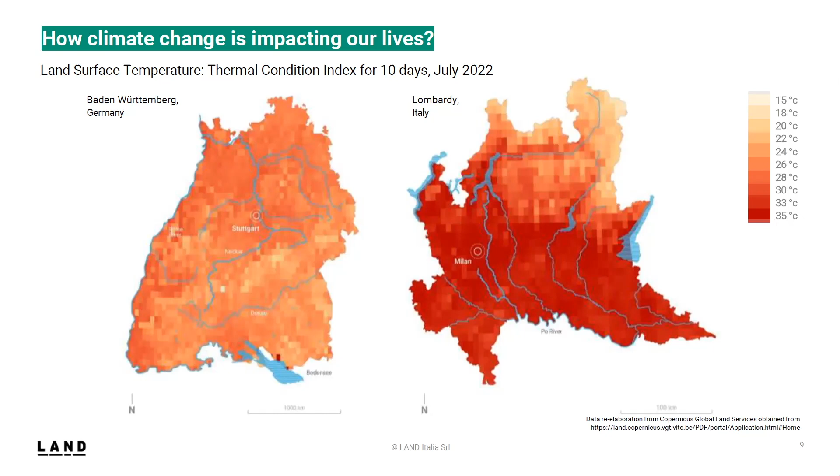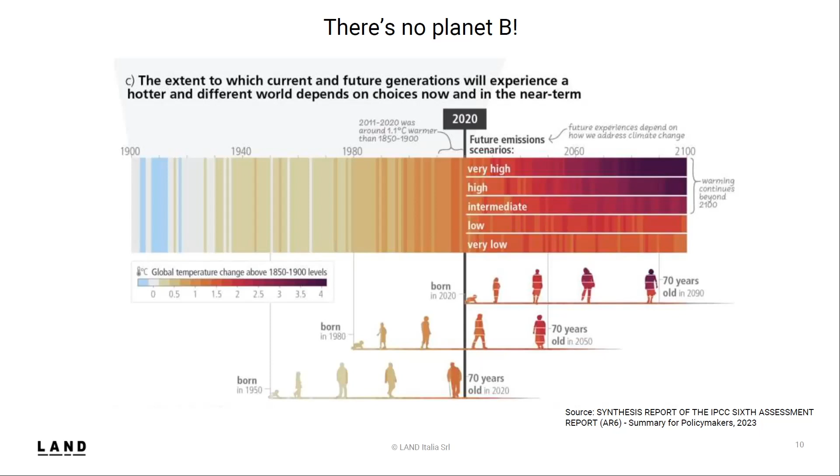This is something broadly documented by the scientific community. You may know that in March, the IPCC synthesis report was published, and there is this quite expressive graphic showing how future generations and the actual generations will be affected by climate change in the next century at least. We see that temperatures are constantly rising, and the challenges occurring through this increase of temperature are also in terms of well-being and health of people.

All across the world, there have been movements, also civic movements, to act against climate change, or at least to promote climate adaptation and to reduce emissions. There have been official conferences, such as the several COPs, but also increasing awareness among people of how everyone can really impact climate change with solutions that most of the time take advantage of nature to improve the quality of life in our cities.

One of our reference frameworks is, of course, the European policy. In 2019, the European Green Deal was launched. It's a quite ambitious plan to turn Europe into a climate neutral continent by 2050. It sounds very promising, but it also requires a lot of efforts, not only for politicians or public institutions, but also for practitioners who are active in transforming our cities through green areas, for example.

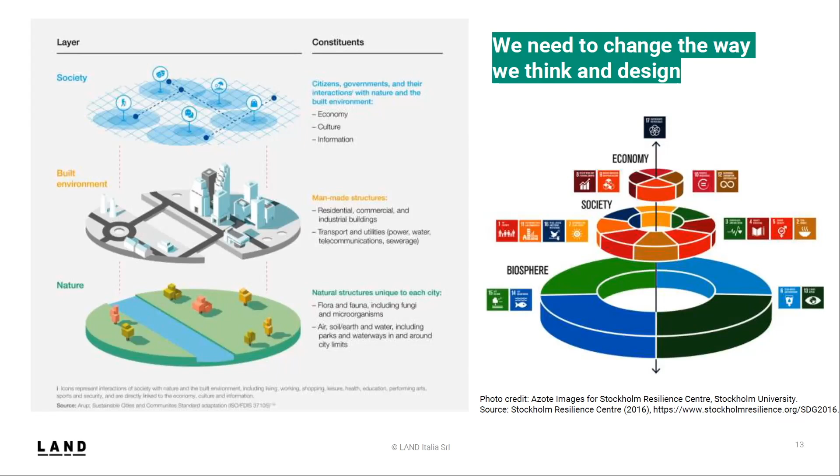At the Research Lab, we have a multidisciplinary team dealing with all these challenges. One of the key factors of our team is that we come from different backgrounds. We have landscape architects, architects, urban planners, geographers, and agronomists.

We work all together on different projects classifiable under 4 typologies. We develop consultancy solutions that come from research outcomes developed within the lab, which can then be deployed in design projects of the studio. We work in research and innovation projects, currently partner of 3 Horizon projects and other initiatives. Thanks to this involvement, we are also able to disseminate and raise awareness on environmental issues through lectures and other training programs. And finally, education - not only towards the outside, but also within our team, as we are in charge of internal training for our colleagues.

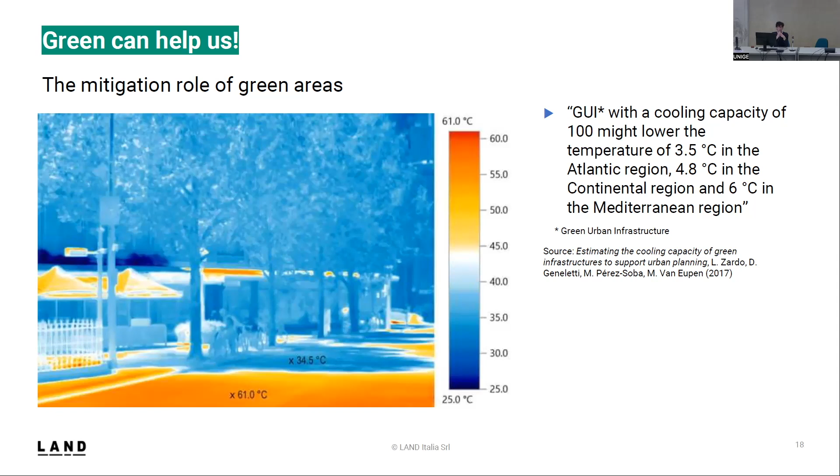Nature-based solutions are one of the main solutions that has been backed and promoted by the European Commission since 2015. Several projects have dealt with the topic - for example ECOLOPES, but also UNaLab, one of the projects I will present today, which realized a pilot here in Genova.

Well, I guess most people in this audience know what they are, but just to be clear, nature-based solutions can be very small, like a pond, or very wide, like an urban park, or even restoration. What's important is that they are no-regret solutions, and they simultaneously provide environmental, social, and economic benefits. I think this is one of the main factors that defines a nature-based solution in comparison to a green space that is not delivering the same services.

The other important aspect is that nature-based solutions are usually conceived within a project cycle. There have been several European projects since 2015 working on nature-based solutions, so there are different models. All of them are valuable, but there are also common components characterized by co-management, co-creation, and co-implementation.

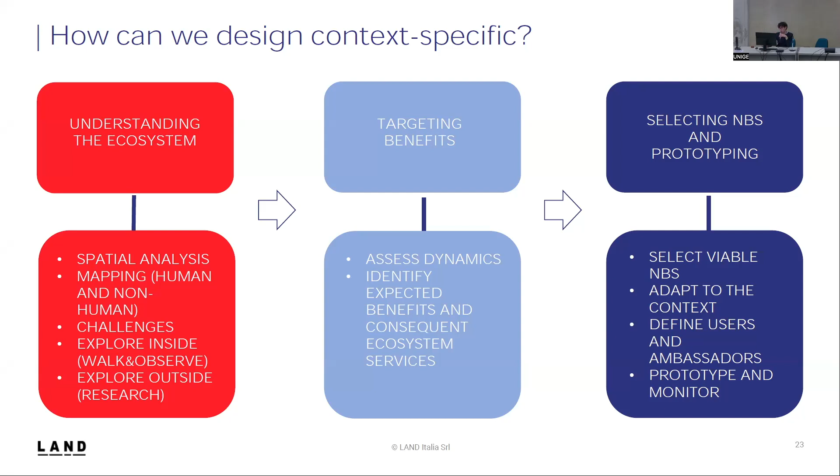To adapt them to the specific context and to prototype them. A key step is to define users and ambassadors who are the ones able to maintain them. So we are talking about living systems, and living systems need care and need someone who is able to use them, but also to protect them and to feed them across time. So living systems are complex systems.

Another challenge that we faced as landscape architects was to identify methodology to work with dynamic systems. Many of the procedures that have been taught to architects were referring to static systems, that is architecture, but nature is growing, nature is changing, and it's evolving, and it's unpredictable. So we have been able through European projects, but also own initiatives, to understand which are possible paths to control or at least manage this dynamic component. And this is coming from our previous experience as, let's say, traditional landscape architects.

So land has a quite broad portfolio of projects. For example, the North Park in Milan is one of the biggest ecosystem recoveries in urban areas. It was started in 1975 and is nowadays stretching in a wide sector of the north of the city of Milan, involving several municipalities in a consortium that is managing the park.

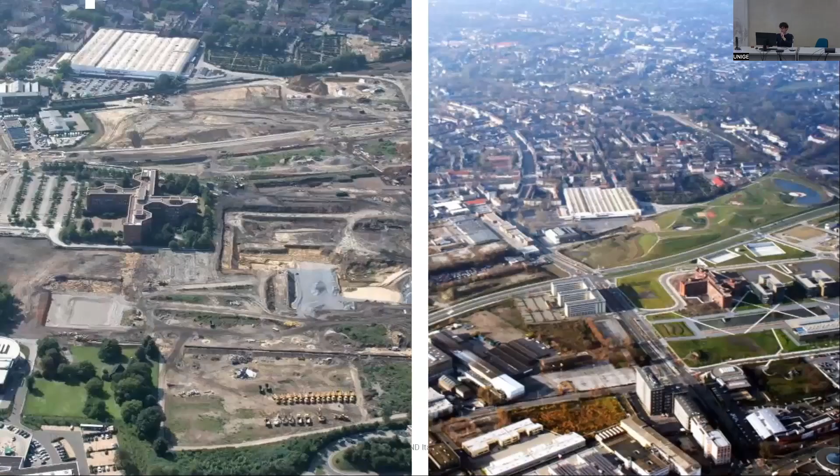Or finally, this is, I think, maybe the most dedicated example that we have in our DNA at land, that is recovering industrial brownfields in cities. This is in Milano again. It's the former Falck steel factory that after many years is now developing a new master plan, and soon will start the recovery of the area, such as happened in Essen from 2009.

This is the former Krupp factory that our colleagues in Düsseldorf have transformed into a new urban park, recovering the former waste site of the factory, that was this one, and turning the factory into the new headquarters of ThyssenKrupp, but with a very integrated landscape, not only in terms of reuse of resources, but also in terms of accessibility for everyone in the city.

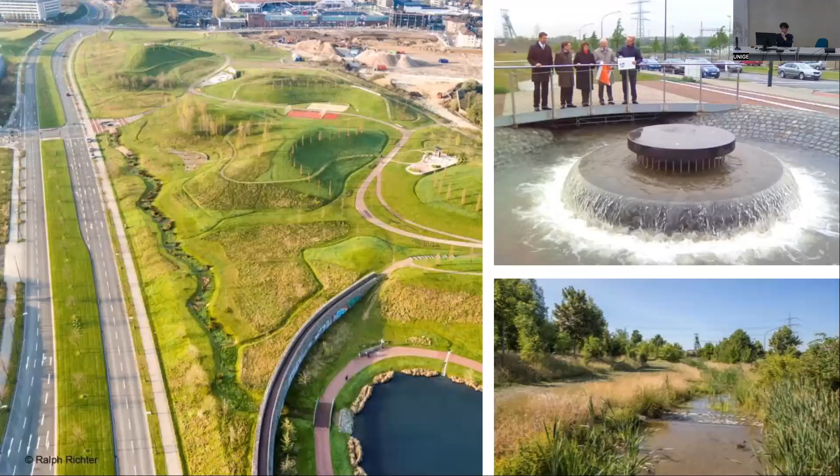Where, for example, the rainwater coming from the headquarters is collected through this bioswale and then into this reservoir. And underneath these mounds, there are some excavation soils that have been extracted from the site during the building process, and we wanted to avoid additional emissions to recover them somewhere else. So you see that it's a circular management also of the resources within the site. And this is how it is nowadays.

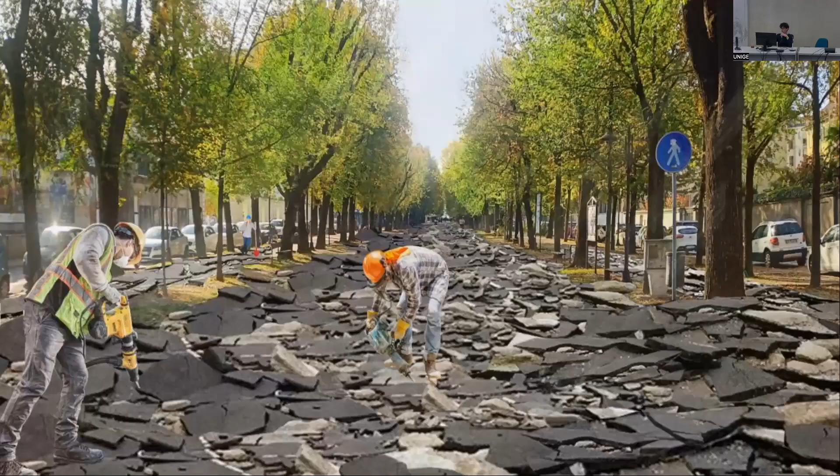So another strategy that we are very determined to bring forward is unsealing our cities, not only because the recent heat waves made many people aware of how asphalt and concrete can really decrease our quality of life during summer, but also because we want to reconnect people with nature, through a more integrated management of rainwater, and to let trees live in a more healthy environment, let's say.

So to do that, a great opportunity came with the UNaLab project that was funded by Horizon 2020 and ended just in November last year. We were 29 partners, and we happily also collaborated with the University of Genova for the monitoring of the living lab in Genova itself. So the aim of the project was increasing water and climate resilience in cities.

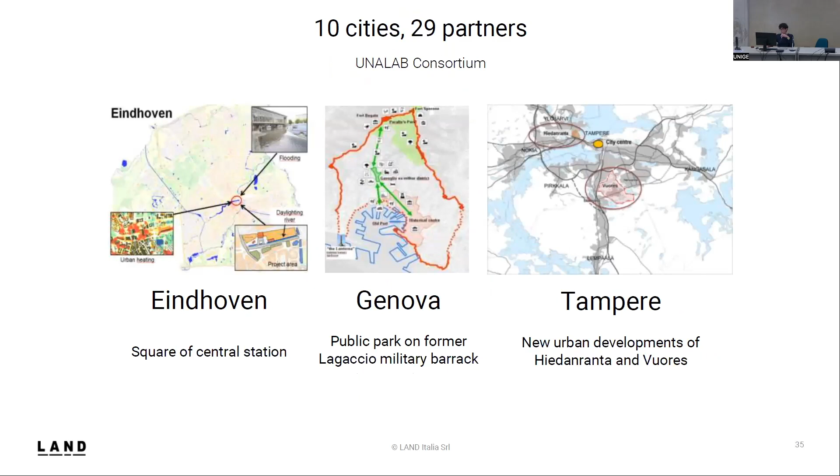There were 3 pilot projects: Eindhoven, Genova, and Tampere, so very different contexts geographically, but also culturally and in terms of urban structure and urban history. And in Genova in particular, we had the opportunity to develop solutions for Mediterranean cities.

When we started the project in 2017, most of the nature-based solutions that we could find on catalogs and scientific publications were related to Northern Europe. So most of them were unsuitable for the climate, but also for the urban structure of a dense city like Genova or like any other Italian or Spanish city or French city or Greek city that you know are very, very dense, and so it's not so easy to find spaces then to integrate green areas where the buildings are already established.

Genova was the perfect case study because it has a quite high population compressed in a very tiny piece of land between sea and mountains. In the city center, the population density can reach 19,000 inhabitants per square kilometer, considering that in Germany, the densest city is Munich with 4,000. You can compare how challenging it is working in such urban context.

Genova had several challenges already before the project. Flooding was quite common because, as you can see from the picture in the middle, the city has been built exactly where it shouldn't, along the riverbeds. This is, of course, because of the topography of the region, not only because they were not aware of that.

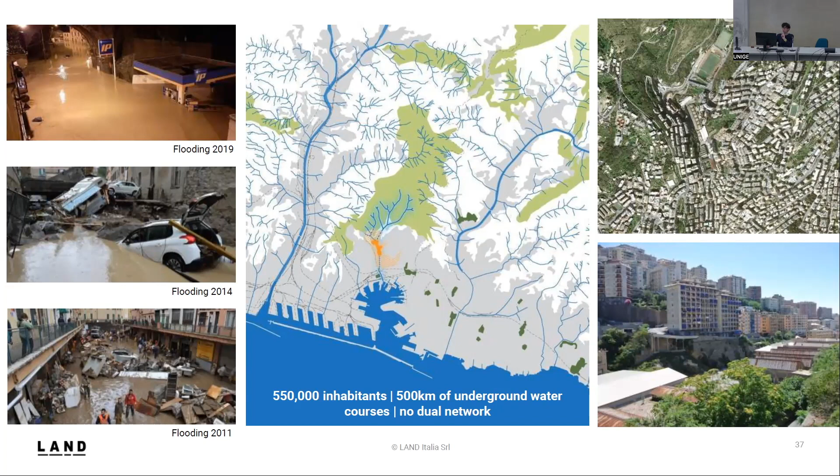The case study we worked on is located here, slightly north of the main station and the harbor. It's called the Lagaccio district. It's one of the densest and also most diverse neighborhoods in terms of social groups and ethnical groups in the city. So topography, density, climate change, plus social diversity—it's quite an explosive mix.

It was quite a complex project, but we succeeded at least in delivering this first milestone of nature-based solutions within a public park in the city. We hope it will be a reference for nicer and bigger projects like this in the area.

The project site is located in this small valley between a natural protected area and the city harbor. It's called the Lagaccio because it hosted a lake until the early 20s or 40s, as you can see here.

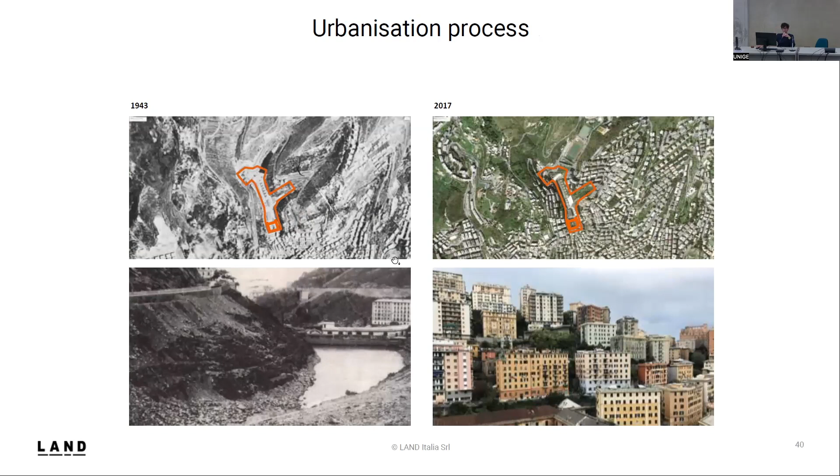Then the lake was dried up and we had a quite wild urbanization process in the 50s, 60s and 70s. This caused a high sealing rate, but also a lack of public spaces and accessible green areas in this neighborhood.

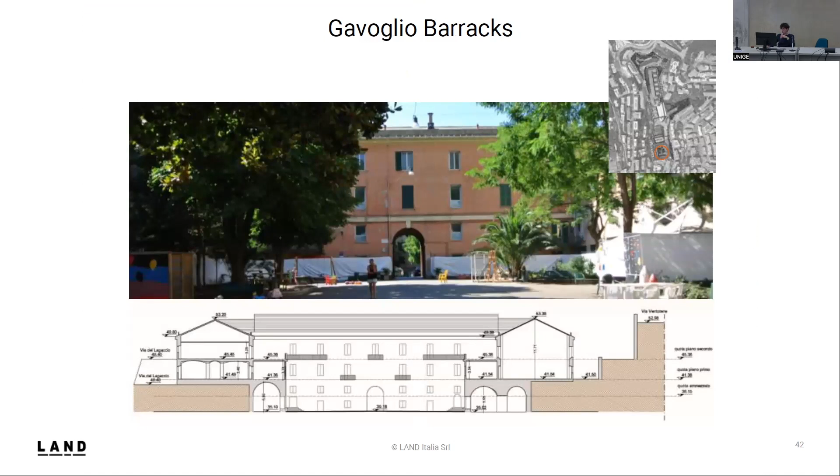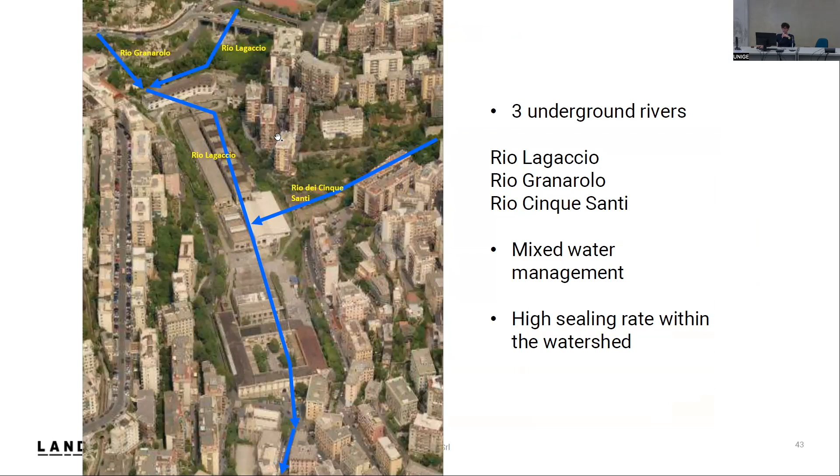The project site is located around a historical building, the former Gavoglio Barrack. Underneath the building, 3 rivers are flowing underground, and they join exactly underneath the area that was supposed to host the new park.

With the European project, we were able to engage a broad diversity of stakeholders and to rethink the entire area from different perspectives. Our first mission was to make space for nature, but also to understand the needs of the community. We worked with ENOL, one of the project partners, the European Network of Living Labs, to shape the 3 pilot projects of UNaLab as urban living labs, with an innovative approach to how we can manage the nature-based solutions with the stakeholders.

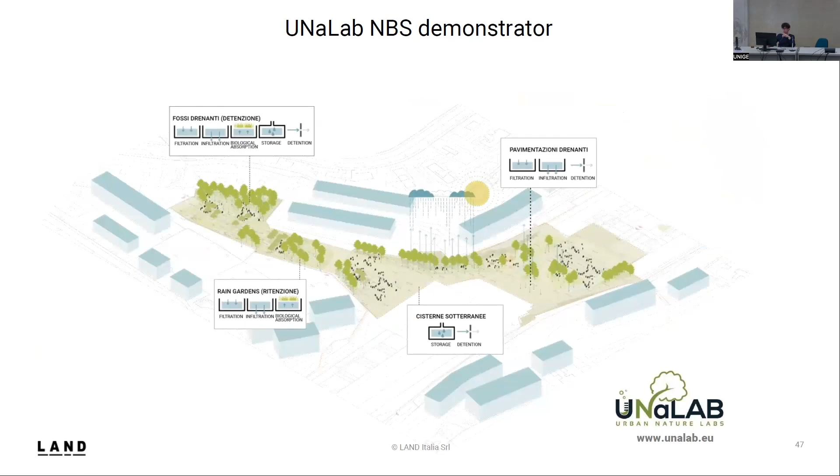At the end, we came up with 4 different nature-based solutions located in the park. This is the final design. You can see that 5 buildings have been demolished and a quite tiny but diverse park has been realized, stretching from one side to the other of the neighborhood.

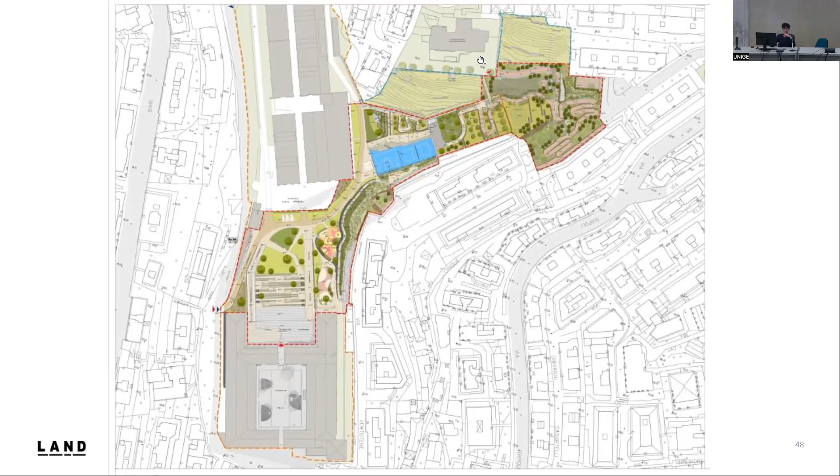This park allowed a double access that was not possible before. Across the area there are 70 meters of height gap, so it was an additional challenge to ensure accessibility for everyone in the park.

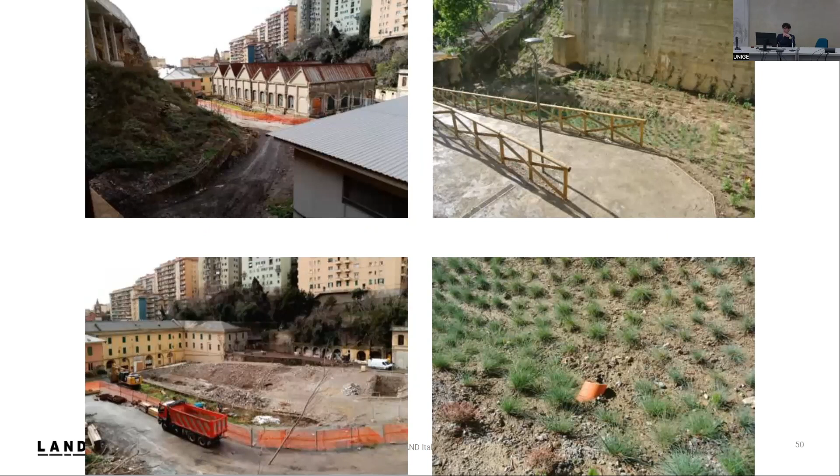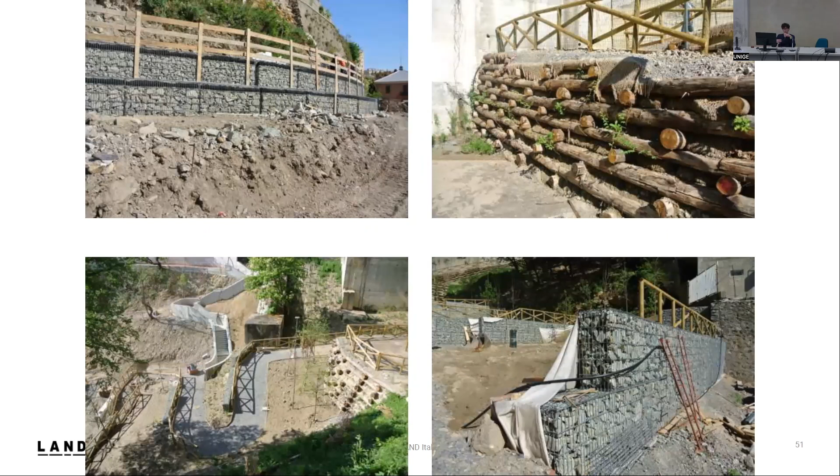Here are some examples of the nature-based solutions implemented in the past 2 years: bioswales, vegetated gabions, log crib walls. Many of the materials found on site, for example the stones from the ancient buildings of the barracks, have been reused to pave some of the squares in the project.

Here are some numbers. Basically, the idea was to increase vegetation as much as possible, decrease sealed surfaces as much as possible, and increase biodiversity as much as possible.

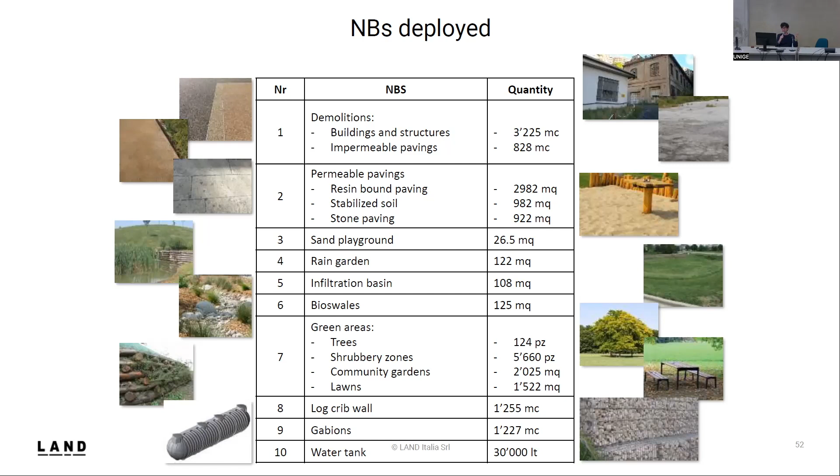It seems easy, but it was not, because the area is very complex—not only for the reasons I've mentioned, but also because during the project we realized that most of it is laying on a stone platform, so in 2/3 of the park it was not possible to infiltrate water or plant trees. This was quite a challenge, so we had to be creative, including vegetation in gabions or creating green walls to mitigate this technical problem.

You can see how the park is also part of the wider system that is aiming to reconnect not only landscape accessibility, but also the ecological connections of the entire area.

On the website of UNaLab you can find the Nature-Based Solution Technical Handbook, where you can retrieve valuable data about the performance of nature-based solutions, including the ones we implemented in Genova. This project was a great opportunity for us to become aware of what landscape architects can do with nature-based solutions. Maybe we had been using them even before, but we weren't aware they were called like that, or of the potential they had in delivering ecosystem services.

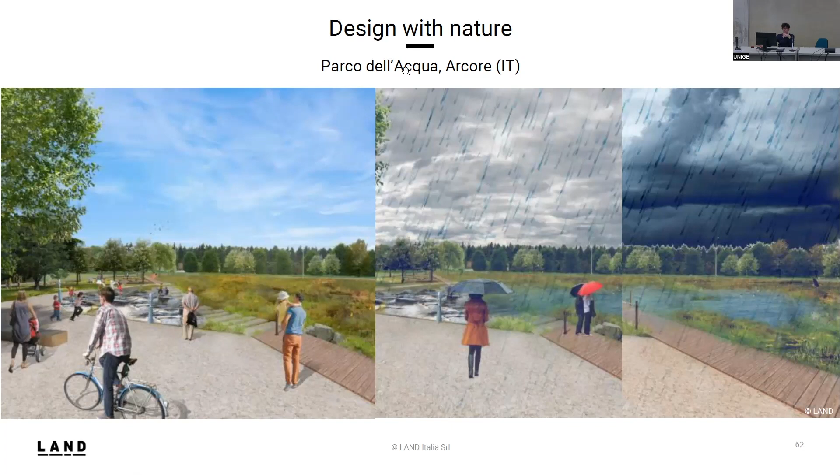This is the first water park of the Lombardy region. It was realized in Arcore, a small city north of Milan. The area was a grassland with a severe flooding problem every time heavy rain came.

We had the opportunity to work on this project with a great technical partner, the water utility of the area, who was also our client. We received a request to realize an infiltration basin, but after talking with them we decided to avoid building a concrete basin, and instead tried to integrate this water facility into a landscape layout. So the infiltration basin is completely concrete-free, let's say.

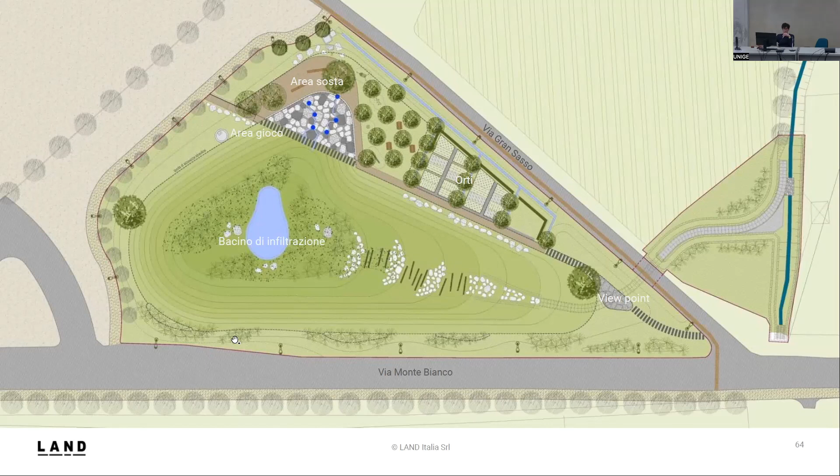We realized a water playground, a picnic area, and some community gardens in order to reconnect the project site with the neighborhood.

Here you can see how the basin is working in dry conditions, and on the right in wet conditions. For us it was quite a surprise that we were able to avoid fences, for example, so kids can just walk and run in the meadow, and there's a siren, a sound alarm, that prevents people from getting in danger when rainwater comes and flushes inside the basin.

Thanks to these experiences, we really pushed hard to integrate vegetation into our projects. We are not working so much with buildings—actually, we are working mostly with public space.

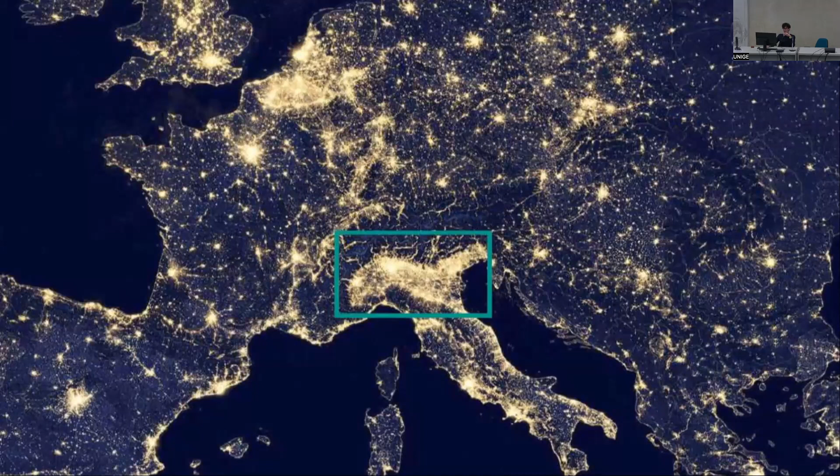The area of northern Italy is for us the perfect experimentation ground, because it's one of the most polluted areas in Europe, and one of the areas with the highest soil sealing rate.

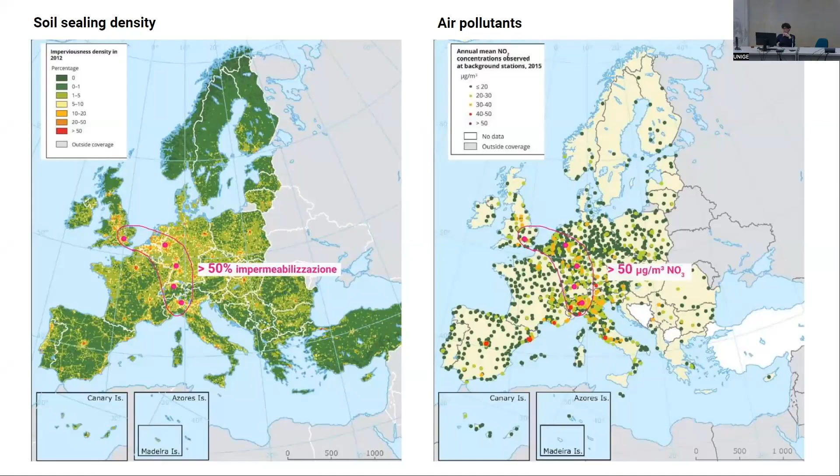Taking advantage of past experiences, such as the Krupp Park I've shown you before, we learned how landscape can really drive the transition into a more healthy and wealthy society.

For example, in the Ruhr area, we were part of several workshops and projects since the 1990s, where the IBA Emscher Park renaturation process started. This process, which put landscape at the center of the regional regeneration process, brought the Ruhr region to become European Capital of Culture in 2010 and European Green Capital in 2017.

So we are really convinced of the power of culture, of people, and of nature—that is, landscape—to transform our regions for the better.

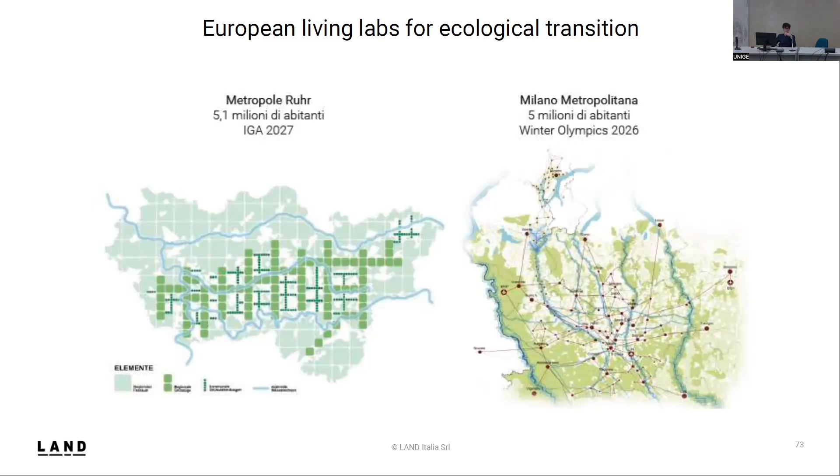This was for us a quite inspiring lesson, because we always try to compare and scale up solutions from different contexts. For example, the Ruhr region is quite comparable to the Milan metropolitan region, not only because the size is similar, but because they share a similar industrial past, and both are going to host important territorial events in the coming years that will bring investments and infrastructural changes, and thus impacts on the landscape.

In Milan in particular, we have been able to build up a quite promising innovation ecosystem, working with research, with practitioners, with developers, and with the public realm.

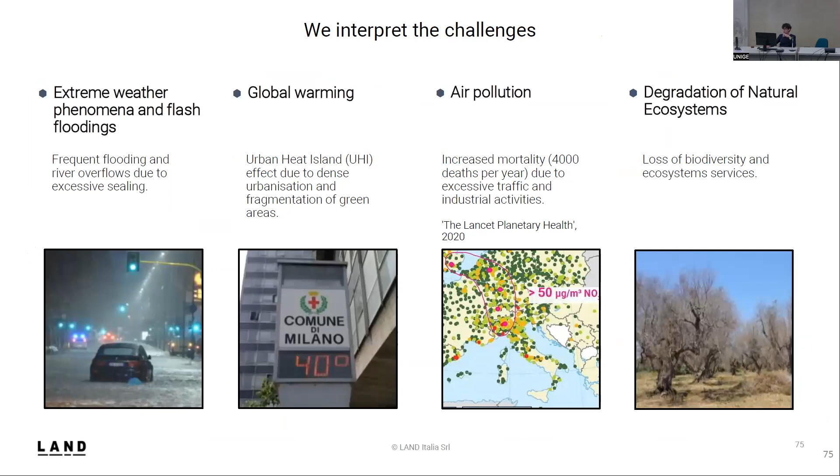We are addressing the most urgent challenges concerning climate change and environmental degradation, such as extreme weather events, heat waves, air pollution, and ecosystem degradation, and therefore we have also been providing targeted solutions to face them.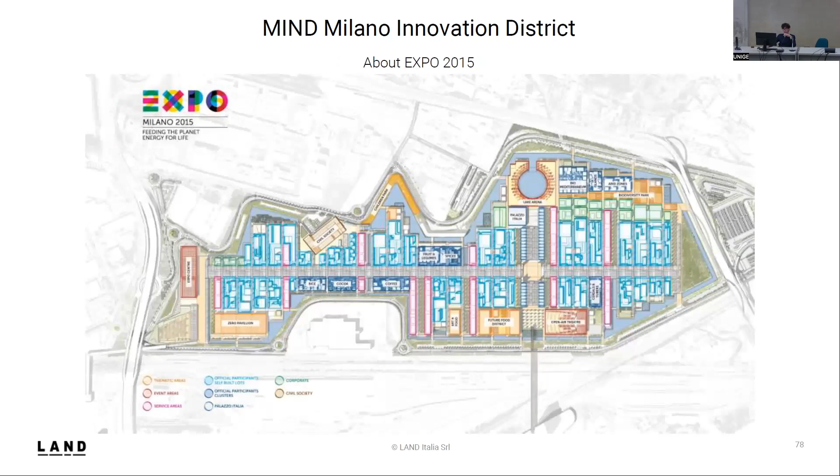One example I want to bring you from this area is the Milan Innovation District. Maybe you have been to Expo, the International Exhibition in 2015. This area has been transformed since then into the most important innovation district in Italy, and one of the most important in Europe. Of course, the process was quite long, because after the event, there was a public tender.

We were part of the winning team together with Lend-Lease, the developer on site. And there was the big question: how can we turn this area into an innovation district that is also sustainable in terms of ecological performances and connected with the surrounding communities.

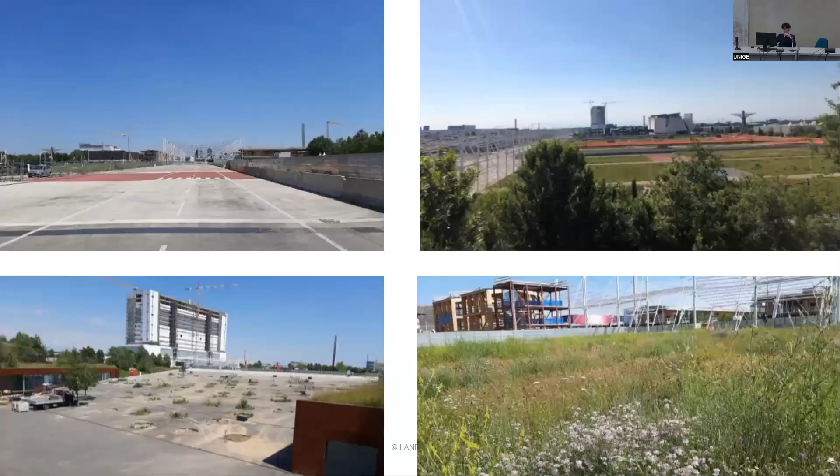The area has been empty for a couple of years, and then the first dwellers came, for example a research center and a social foundation, and Lend-Lease, the developer. We have been working with them on three main topics: meanwhile uses, dynamic topography—because the entire area is a never-ending building site—and an experimental park that is a sort of anticipation of the future public park of the area.

This is the master plan of 2018. There have been other 25 versions, so I cannot present you the newest one, because it's still under approval of the municipality. It's a very big area, 1 million square meters, so many players, many challenges, and a constantly evolving debate on the master plan.

But I think what is important here is that we were able to bring into the process also a European project, so research and innovation. This project is called T-Factor and started in 2020.

It's a project aiming to inquire into the transformative potential of meanwhile uses for urban regeneration. Of course, our contribution was to understand how urban nature can be included also in these temporary processes, and how the urban quality of such temporary spaces can be improved in such an uncertain context.

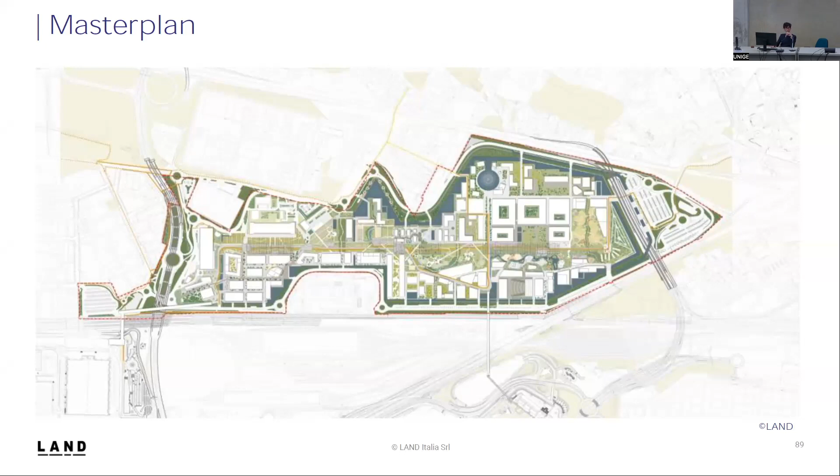For example, in Milan, there is a master plan leading the transformation on site, but this master plan is maybe very far away from the reality of people working in the area, and also far away from the micro scale of landscape dynamics of the green areas already present there.

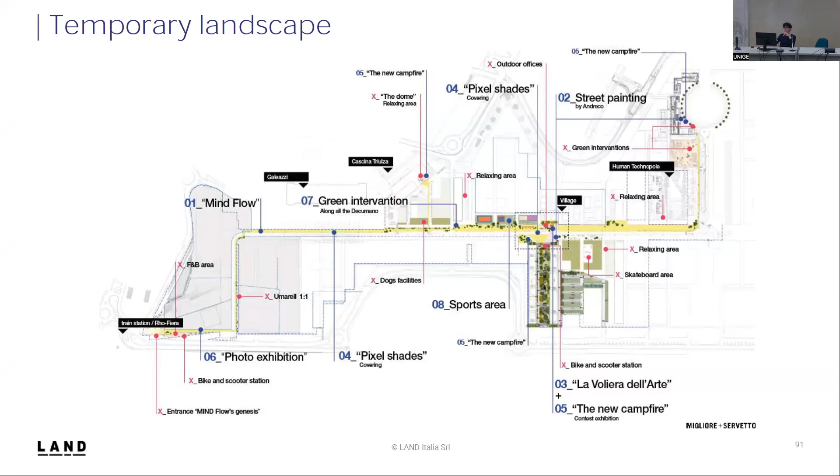So here we have been working with the developer, delivering a temporary landscape program intended to accompany the visitors—or I wouldn't say inhabitants, because no one is living there—the dwellers of this area from the main station to their workplace. And so from a quick sketch, it became reality.

So what does it mean then in practical terms? We have been both working on very temporary solutions, such as the trees you have seen on this concrete boulevard, but also on more stable solutions, such as rain gardens and outdoor working areas.

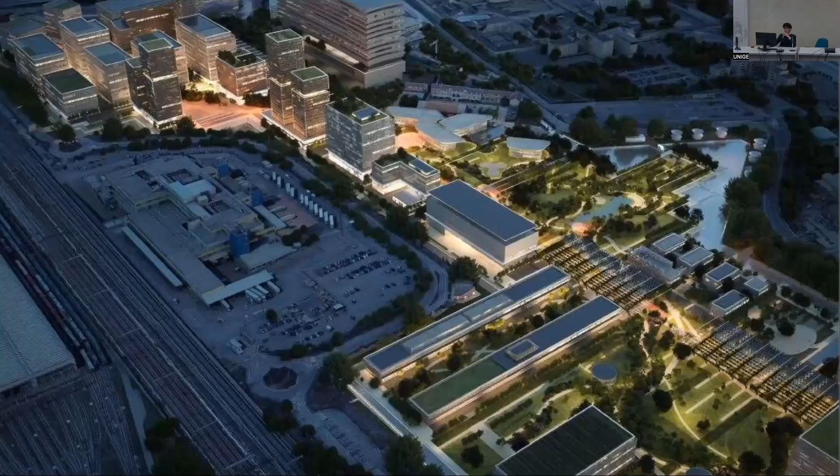And these are all small trials that can help the developer and all the stakeholders understand if the direction they have undertaken with the master plan is the correct one, or the solutions can teach them how it's possible to redirect the master plan.

Here we have been using innovative methodologies, at least innovative for the landscape design approach that we had. So we have been working with emotional mapping, involving different stakeholder groups—for example, asking them which were the perceptions they had in the landscape and how they imagine transforming a concrete slab into a garden.

Or making them aware how many things we could do in sealed surfaces of the city that are underused nowadays.

For example, this was the program in Rho. So we organized urban walks from the outside to the inside. Maybe if you look at the map with the eye of an urban planner, you get aware that the area is not exactly the most beautiful walk in the world.

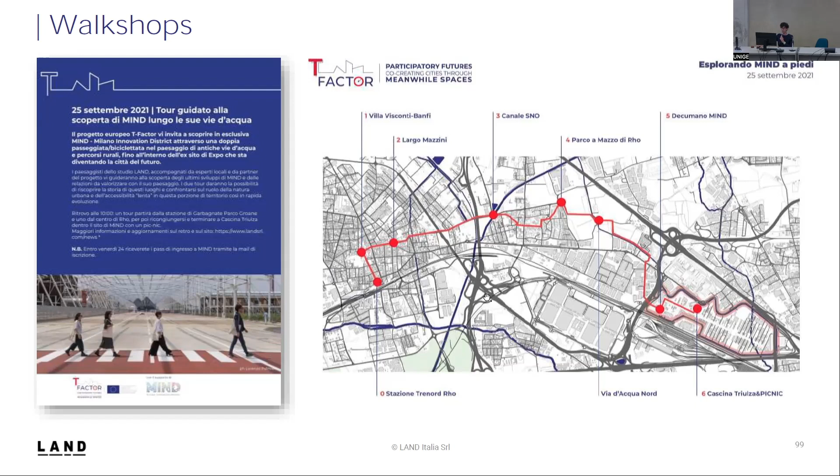So it's not the waterfront of Liguria. It's a municipality that is encircled by big infrastructure and industrial areas. So it was really hard also to make people aware of the value of landscape in such a deprived context.

But we were happy with the results. So we were able to map human perception, but also to map the non-human needs.

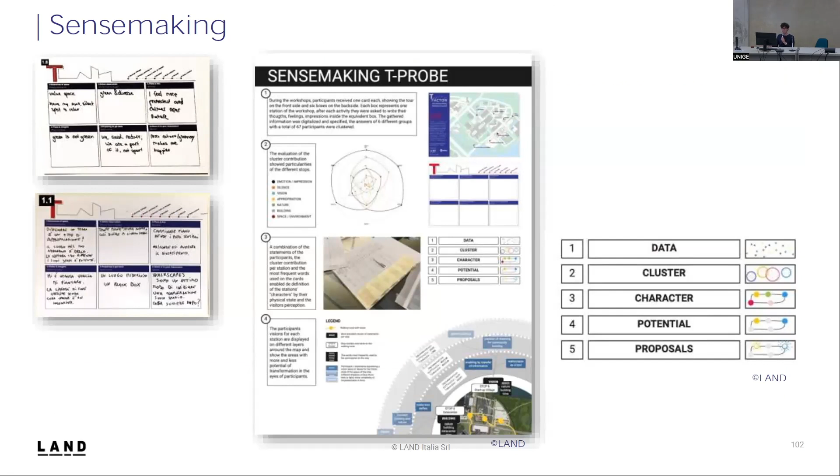The output of this activity was a sense-making set of graphics that led us to deliver this place-making compass, showing which are the potential areas where meanwhile uses related to landscape can be implemented, how these could be hard or easy to realize, and in which time frame. This is intended to be a tool for a developer or the owner of the area to understand which roadmap he could take.

This process led us to implement more stable uses, or at least a prototype that might be replicated by the stakeholders on site.

For example, we organized a program called Biodiversity at Mind for Schools, where we brought 8 classes from 2 different schools in the area, and built together some insect hotels, some bug hotels, and created some seed bombs. Another activity we are implementing, opening in 3 weeks, is this Civic Nature Biodiversity exhibition that will be displayed within one of the meadows of the area.

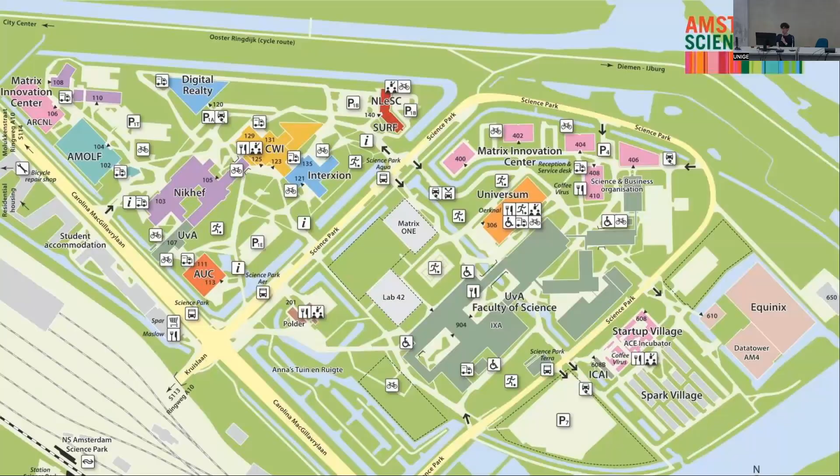In Amsterdam, we have been working on a similar topic, but in a context that is more established. It's the Amsterdam Science Park, a research and university campus already existing, with some areas that are not exactly ecologically sound or attractive for people right now.

So we have been working with different groups, mainly university students, a school, and also some practitioners. We created a hybrid approach to map biodiversity, using existing scientific documents already available on site, citizen science tools such as iNaturalist, and through a participative workshop we were able to join the 2 knowledge fields.

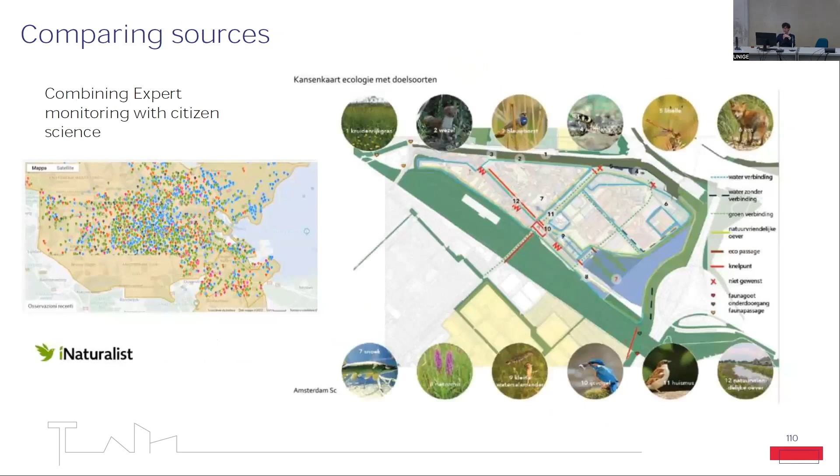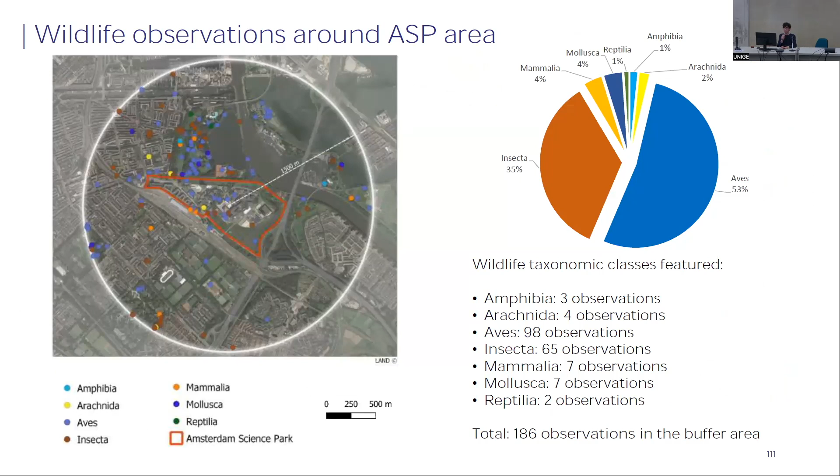This made people more aware of the value of biodiversity and the possibility to increase this value with small solutions. To do this, we have been inspired by animal-aided design. I know we have some friends from Munich here who are the fathers of the methodology, and this was very interesting for us to understand how in different contexts animals can become stakeholders in the participatory process.

Among the outputs, we delivered the biodiversity mapping, documenting how citizen science can be a tool to map biodiversity for non-experts, and then a portfolio of solutions conceived to be part of a workshop methodology. So we have a set of 3 cards: the animal portraits, the place cards, and the solutions card, that can be used by participants from different backgrounds to create their own small meanwhile use in the landscape.

For example, here we built some salamander houses and similar solutions with kids.

And finally, in Bilbao, that is the 3rd pilot case we have been focusing on in this project, there is a wide island in the middle of the river that was a former industrial area. Here we were asked to help the local cultural and creative industries make visible their impact on the island, and make the spaces more livable in the waiting time for the transformation of the island itself.

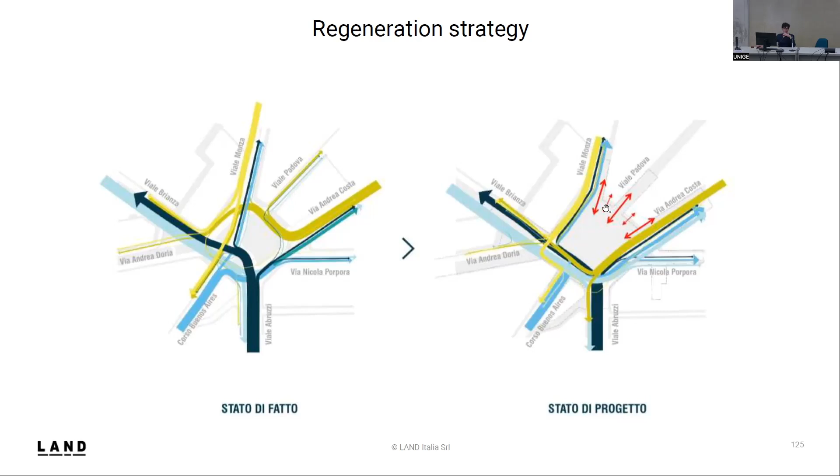So the idea was that instead of leaving the privilege to cars, we decided to make this square really a square, becoming a sort of peninsula of the neighborhood. Of course in the competition there was also the requirement of having a developer to make the initiative economically sustainable, so we were asked to include some new buildings, but we won - at least from our perspective - a really hard fight in making the center of this intervention green and being able to plant trees in real soil.

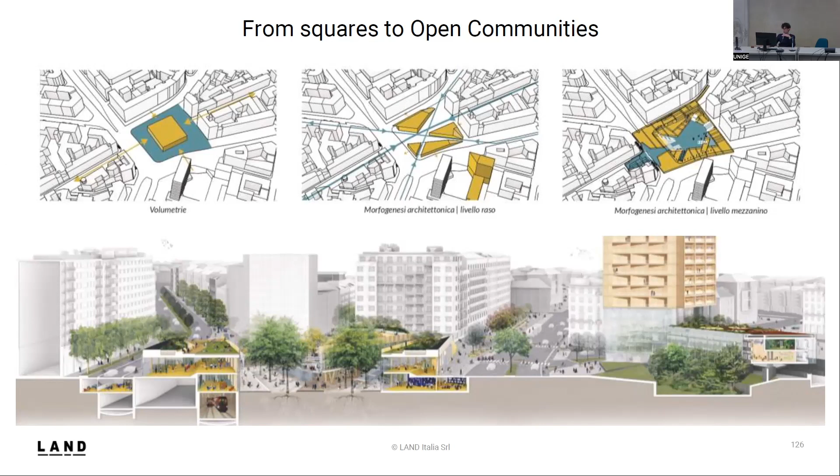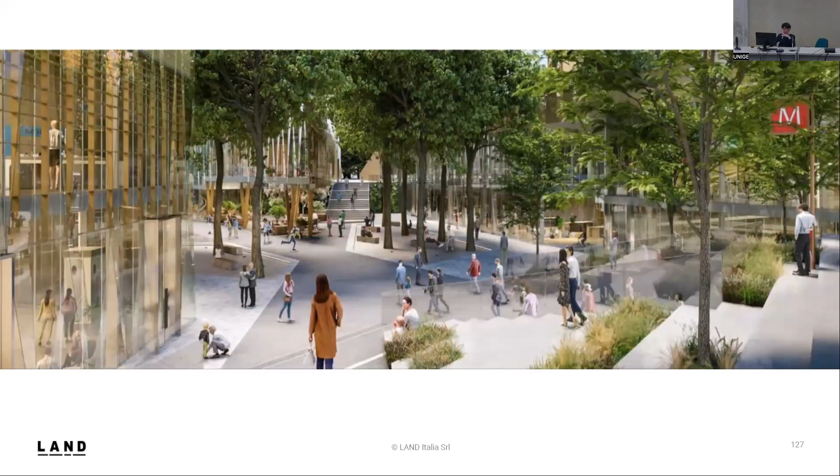So basically what we agreed was to open up the metro station and plant trees in the floor of the station, not where the trains run, but in the hallway. The metro station will become an open air square, and around it we were able to include the buildings, while the entire square manages its own rainwater flowing from the pavement to a central collection point. On the buildings there will be accessible green roofs to extend the park on top of them.

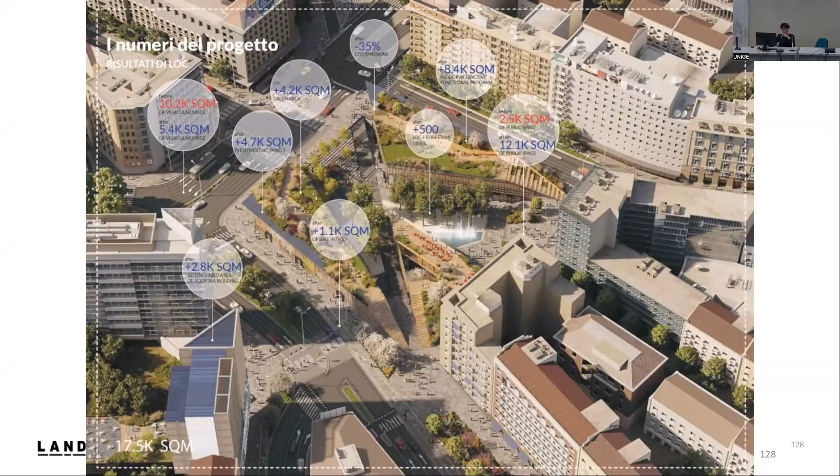Still in this attempt to anticipate the change of landscape with some small intervention, during the Triennale exhibition, I think it was 2021, we brought some concrete slabs symbolizing the future concrete that will be fragmented on site in the square. We also put here the actual trees that will be planted in the square.

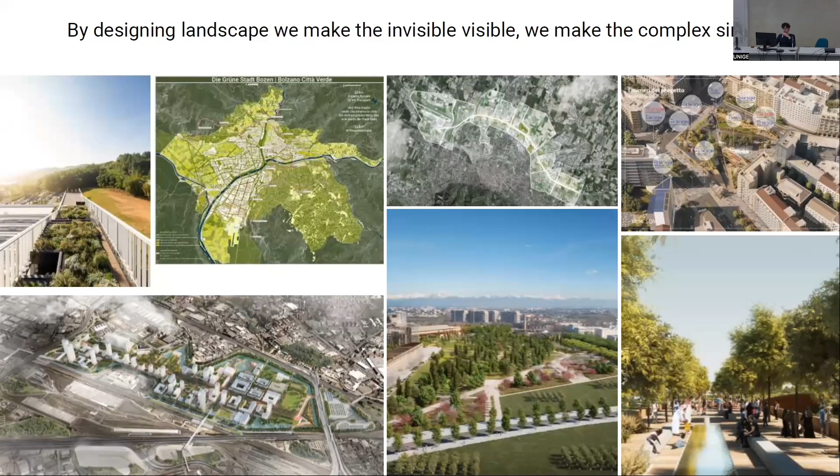I'll do a very quick roadshow of the last slides, just to show where our research is going, in order to make the productivity of landscape, as we've seen it so far, even more visible but also more quantifiable, let's say.

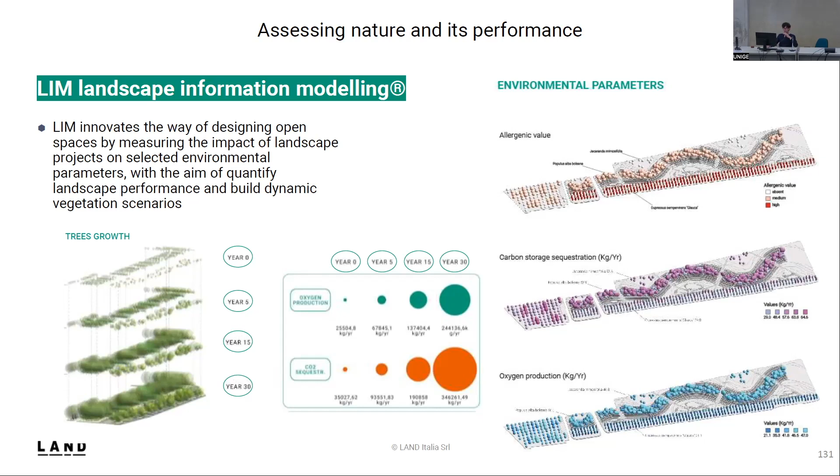We have been implementing a methodology to quantify the environmental benefits of trees in landscape projects, in order to integrate this service into BIM, Building Information Modeling, that is basically thought for buildings and infrastructure and not for living systems. To do that, we base our research on i-Tree values, but then we created three-dimensional models that are in dialogue both with BIM and GIS.

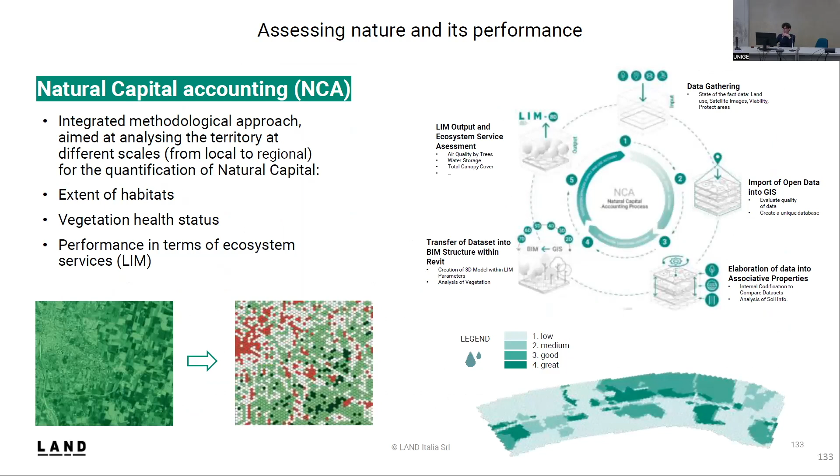We are able to deliver scenarios of which ecosystem services can be improved by trees in different time scenarios. This is also one of the fundamental components we use to assess natural capital accounting, which is more and more a key asset required in European legislation, but also at international level, to quantify the benefits and assets of natural capital. Along this path, we adapted this methodology to very targeted research fields.

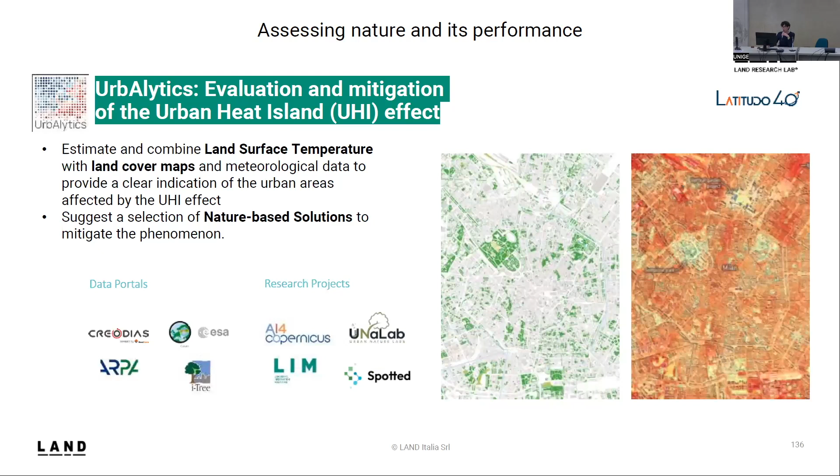For example, how to mitigate vehicular traffic pollution with nature-based solutions, and how to evaluate and mitigate the urban heat island effect. In this case, we are developing a specific workflow with a startup called Latitudo 40, within a sub-project of the AI for Copernicus project called UrbAlytics. We are working on two cities, Milan and Naples, delivering data sets showing how the urban heat island effect can be mitigated by green areas.

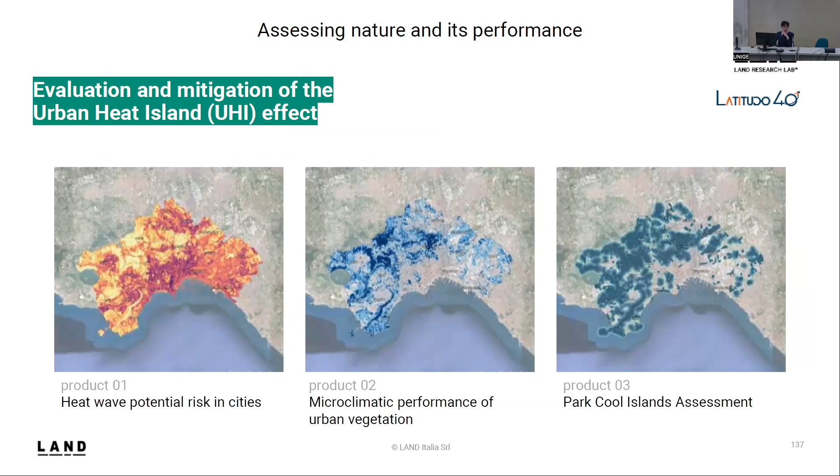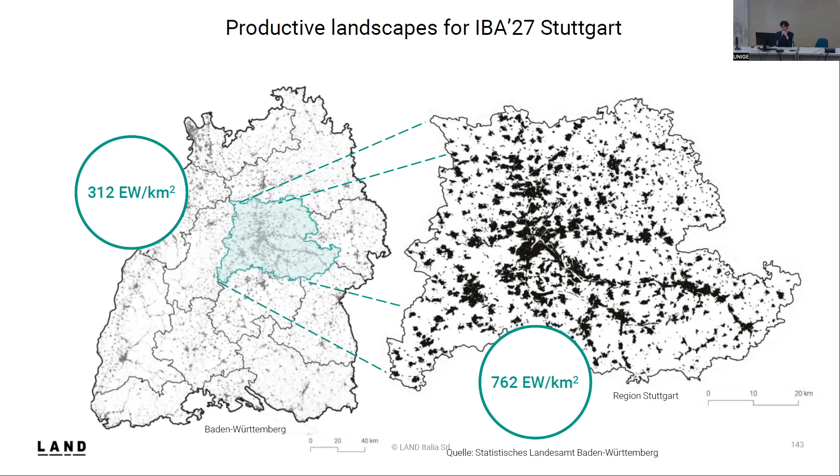Maybe just shortly, I'll conclude by showing this study we are developing for the IBA Stuttgart, an institution in Germany that for 10 years has been promoting research and projects in the metropolitan area of Stuttgart, where we translated all these research and design outcomes into a specific strategy to deliver productive landscapes for agricultural land, which is also a key component in our metropolitan areas.

Here we have been analyzing different open space typologies and their possibility to interact with agriculture, while at the same time delivering ecosystem services, tackling climate change, but also promoting new business opportunities in rural areas.

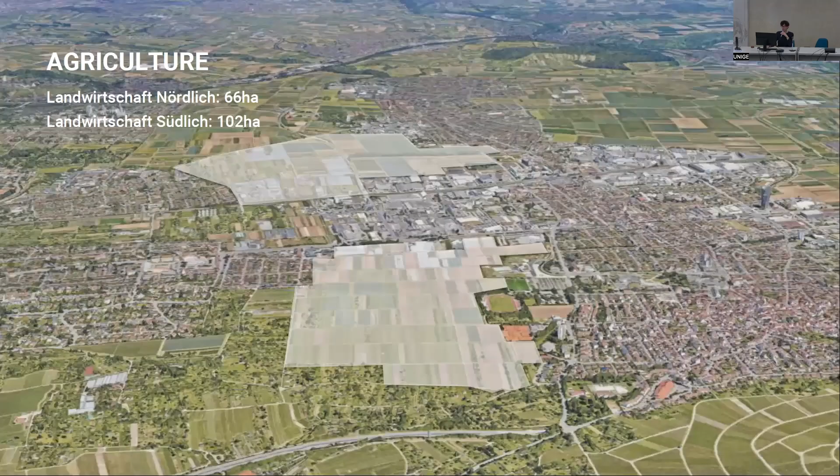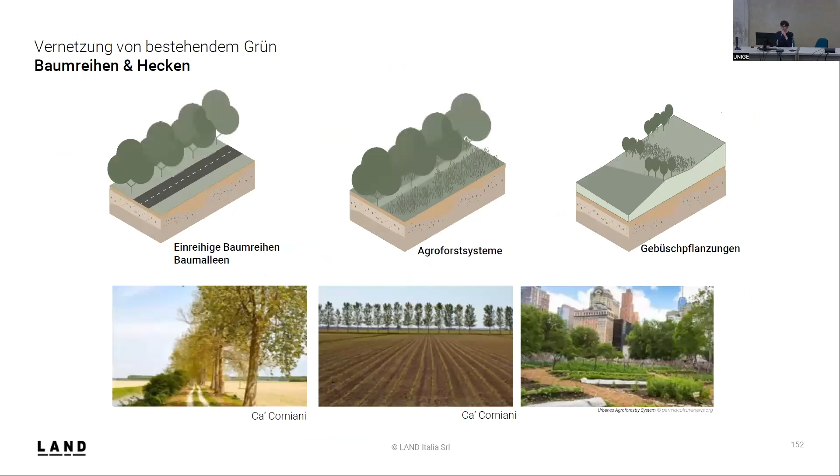We developed a nature-based solution catalog, experimented in one specific case study called Fellbach, a municipality not far from Stuttgart, where agricultural and industrial areas are quite tightly packed together. We are studying how nature-based solutions can be adapted also to rural areas to deliver ecosystem services and promote a sustainable integration of agriculture, landscape productivity, and urban development.